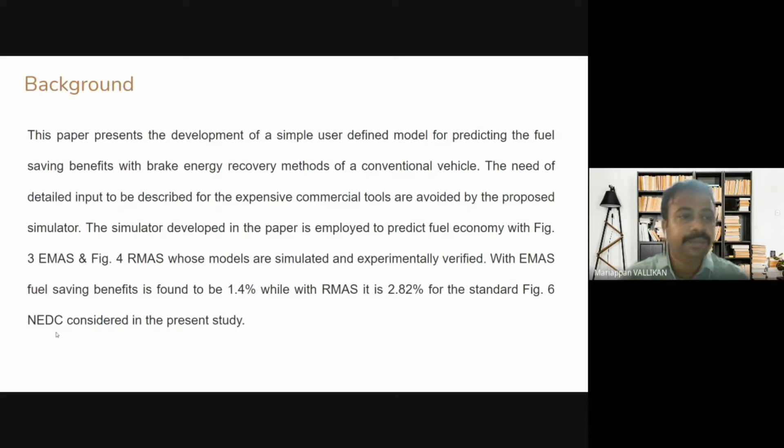What simulators are available? Today you see a lot of simulation tools commercially available, and you can check how they are modeled. There are many names, but the standard approach is a dynamic simulator using backward and forward approaches, or a lumped parameter model. These are the two types most simulator companies use to develop their models.

I'll give an example. Today you're familiar with circuit networks—you can model a resistor, a DC power supply, and make a measurement tool in MATLAB to visualize the voltage applied, the current, and the power dissipation. All this can be measured with the MATLAB simulator tool. But if you know the fundamental relationship between voltage, current, and power, you can also simply develop this simulator in Excel.

In Excel, if you know the mathematical or electrical relationship between your model's parameters, you can build your own simulator model. That was an eye-opener for me—that we can build a simulator model as long as we know the fundamentals of the electrical relationships between all the parameters. That's where I'm touching upon how to build our own user-defined simulation model.

That is how I'm limiting to that statement. I'm not giving a competency to the commercial simulator models. Right? Okay, what is the market trend?

Beginning with 2017 to 2030, we see lot of non-petroleum or gasoline based vehicles would be enormous in the market, and we say 2025 is the stage where we can see the drop in the conventional IC engine. So during 2021 also we have started seeing some of the electric vehicles coming to the market. So this is the market trend.

We can also see in 2017, 91% on the conventional IC engine, where conventional IC engine is nothing but where we fueled by petrol or diesel. So 91% is going to deteriorate to 67% in 2025. But there is no zero reduction, we still need to be with this conventional IC engine, not so bad. So it is slowly taking from a mild hybrid, then electric vehicles to the range of 25% in the market, then 5% on the LSEV, which means low-speed electric vehicles, light mobility. So that is the market trend.

And this is the architecture. So far, if any doubts, please rise. We can go dig into deep into the architecture level. If any doubt, please interrupt me, so far if you are not understanding any terminology or anything.

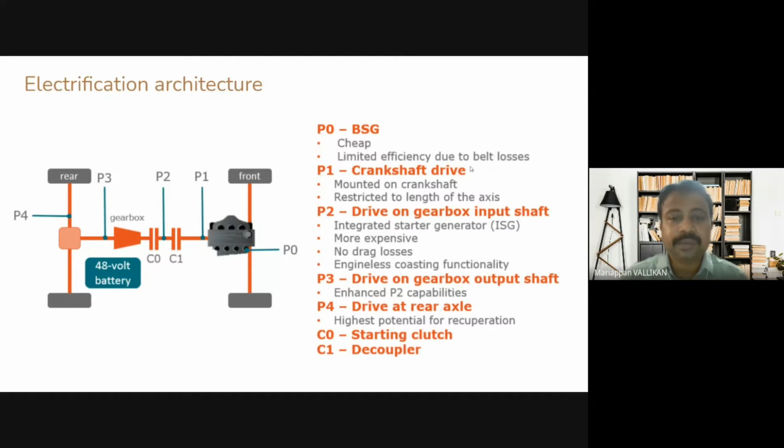Yes, next. Okay, so from now onwards we are going to introduce, today we are having a growing concern over environmental pollution and oil dependency. Today all the petrol prices are reaching to 100. So all governments are wondering where we can fight on the oil prices. It's going up, so it's not our interest, but I'm just seeing oil dependency on oil prices is very huge. And the automotive sector is continuously investigating on alternative fuels and modified powertrains, these are all things happening.

And hybrid electric vehicles offer fuel economy, why? Mostly by employing the regenerative braking system. What is regenerative? We can understand it in the coming slides. And hybrid energy storage, there is a lot of research happening on energy storage systems. Today, the automotive industry started using some batteries from chemical conversion, you might have heard of some lead acid batteries, now so-called lithium ion battery, and there are a lot of battery technologies also available.

And now recently there is a trend of using ultra capacitors that are equivalent to an alternate energy storage device. The same approach can be followed for a conventional vehicle to improve fuel economy. Okay, so all this we will see through the coming slides.

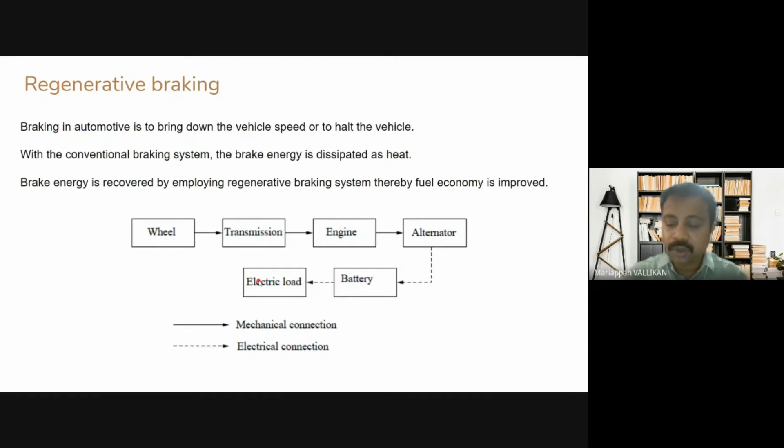And I'm going to touch upon batteries versus supercapacitors. I'm not going to go so deep into the chemical substance or physics inside the battery. I'm just giving some numbers so you can visualize how much energy density is stored by the battery, and how much energy density is stored by the ultra capacitor.

Comparing battery versus supercapacitor: battery has high energy density, say 100 watt-hours per kg, and it is only 1 to 10 for the supercapacitor. But if you look at power density, that is where the difference lies. At 10 watts per kg it is 1 kilowatt, so it is 100 times more in terms of high power density, 1 kilowatt.

And the battery has very low degradable cycles, meaning low life cycles, whereas the supercapacitor has very high life cycles. If you buy any car, once in 4 years or 3 years we need to change the battery, and the same story applies even to today's two-wheelers - we need to change the battery once in 4 years or 3 years. It also depends on how we are using the battery. Today everyone is using solar inverters and such things, and we know how frequently we face challenges in battery replacement.

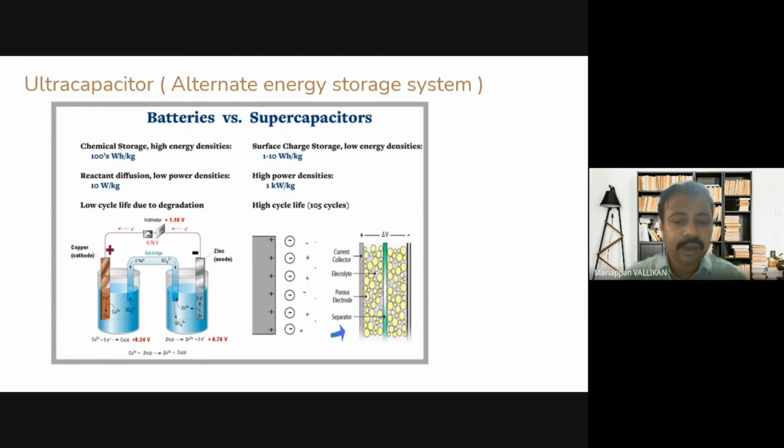So now we are talking about a regenerative braking scheme. This is the research proposal I made for the conventional vehicle, not electric vehicle. What are all the possible ways to get the regenerative braking energy?

The first one is the EMAS, which is the engine mounted alternator scheme. If you go back to the powertrain architecture, it is on the P1. If the alternator is mounted near to the engine and we are extracting energy from it, that is the engine mounted alternator scheme.

Then the rear axle mounted alternator scheme is P3. If you are taking the energy near to the rear wheel, then the scheme is called the rear axle mounted alternator scheme. So in P1 and P3 we can extract the regenerative energy during the braking operation.

This figure also shows how we can extract the energy, the power flow from the wheel. It goes to the powertrain, which is connected with the engine, and from the engine to the electric motor. For understanding, consider this electrical machine as an alternator. This energy can be transferred to the alternator, converted into electrical energy, and stored into the battery. This is just to understand how the mechanical energy can be converted into electrical energy and stored into the battery.

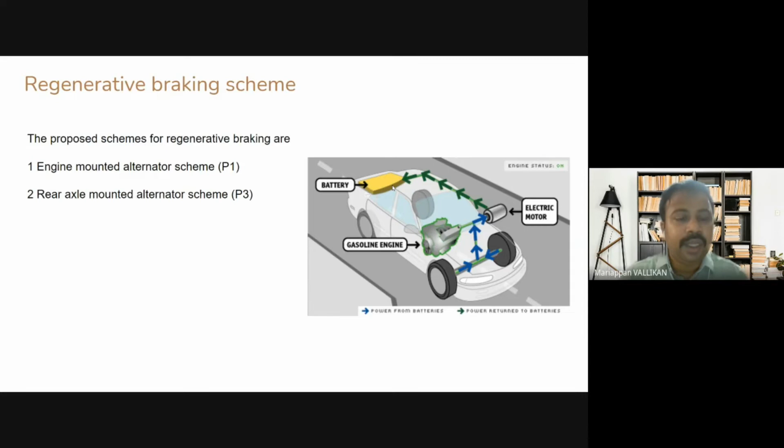So now we are going to understand what the EMAS scheme and the rear axle scheme are, and how we are doing the simulation model.

The engine mounted alternator scheme's electrical connection: the alternator converts mechanical to electrical energy and develops a three-phase AC waveform, a sinusoidal power. It will be developed from the alternator, and all automotive alternators have a rectifier unit within them that converts this into DC. In all electric vehicles or conventional vehicles, we deal only with DC power.

So don't get confused, we are all talking about DC power. When we have a machine developing AC, in automotive applications we convert it to DC using a rectifier, either a passive rectifier or an active rectifier, depending on the power electronic development work. We call it a rectifier.

The power out of the alternator is available to the battery through a series of switches, SW2 and SW1. Don't get confused about what SW2 and SW1 are, it's just the architecture I proposed, and it is also a patented one. What I am sharing is the patented architecture, which is the outcome of my MS research work. It connects to the battery and it connects to the load.

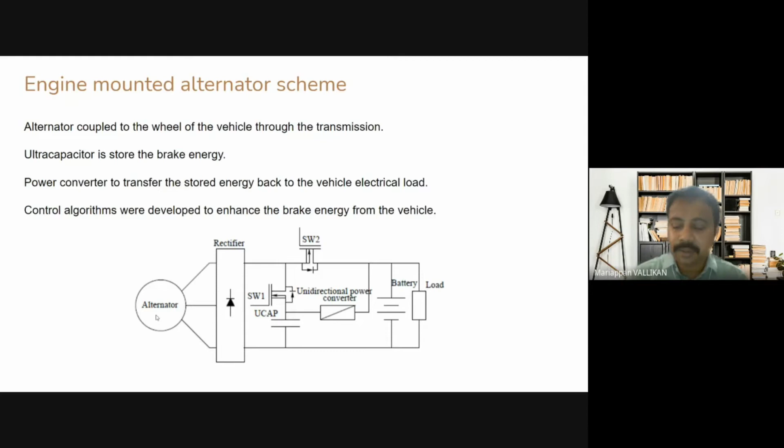In the rear axle mounted alternator scheme, how is the electrical connection? The first alternator is mounted near the engine, so obviously it is connected to the battery and connected to the load. This is the arrangement of the conventional electrical connection.

The rear axle is mounted near the rear wheel, where we will have some mechanical connection. It is also built with a rectifier, and it drops the power into the ultra capacitor. From the ultra capacitor, there is a unidirectional power converter, which we call a DC-DC converter. Unidirectional means the power transfers from one side to the other side only, not vice versa. So we call it a unidirectional power converter, and it supports the load. This is the electrical architecture.

So we saw the two schemes: how the EMAS or engine mounted alternator scheme, and the rear axle mounted alternator scheme, have their electrical connections.

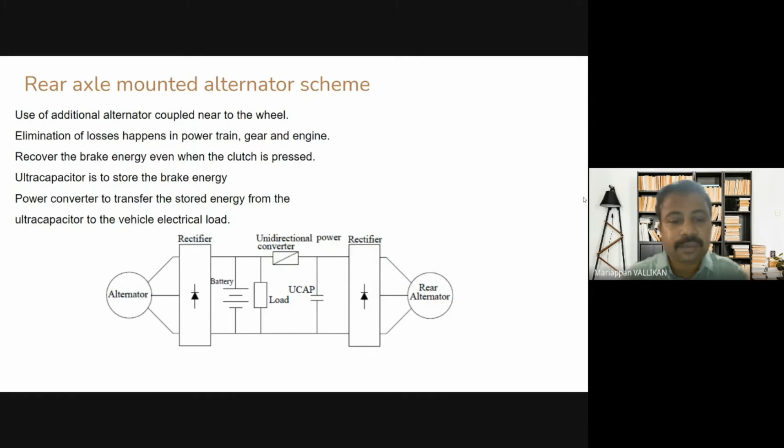Now we are going to understand how to develop the simulation model. I am bringing out the idea of why we need to do the simulation model. By approaching this scheme, I will definitely save fuel economy, I will have some fuel economy benefit. But unless you do a vehicle trial test, unless you do some simulation, you may not know how much you are going to save and what method gives higher advantages compared to other methods.

Okay, those are all doubts you will have. I said the simulation model is not less in commercial value, it is much higher in commercial value. So now we need to understand we can develop a simulator model to understand what electrical energy is available and how much fuel savings can be brought out from this tool scale.

So in any simulation, you will have a simulator with a lot of inputs. We will go through some subsequent slides to understand what is drive cycle, alternator, battery characteristics, ultra capacitor, boost converter, and the load. These are all block level understanding, showing what the output would be after giving all the inputs to the simulation model.

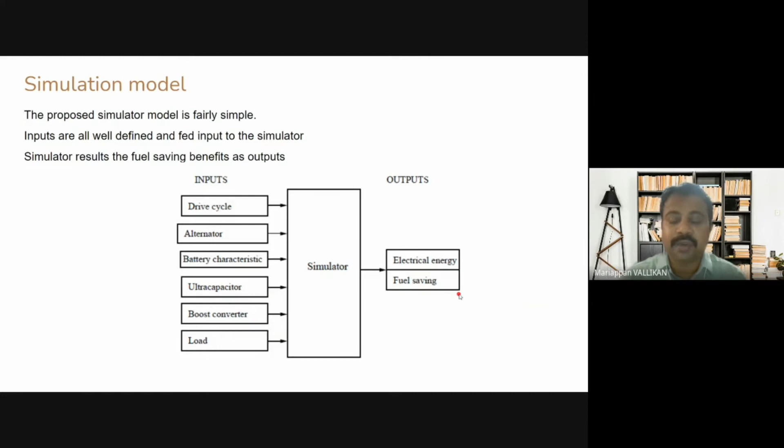So first we will touch upon the drive cycle. What is the drive cycle? Drive cycle is nothing but, say today you take a drive from your home to the college. How much of time you will accelerate, coast, maintain the same speed, and again decelerate due to traffic condition or some emergency. Those patterns are what we call the drive cycle. Is it clear?

If you take any city bus going from one destination, say in Bangalore from MTC station, reaching some other station, there will be bus stops. There it will stop and be at zero for some time, and again it will accelerate, maintain some speed, decelerate, and stop. This is so called the drive cycle, showing how we can understand the movement of the vehicle.

If we drive any vehicle coming into the market, the automotive industry will say this is the mileage for the car or two-wheelers, say 60 or 70 kilometers per liter for two-wheelers, or 15, 17, 20 kilometers per liter for four-wheelers. All this can be thoroughly examined only through the drive cycle. They will not claim the same mileage for any traffic situation; they will always say it is as per the standard ARAI drive cycles. There are organizations that do this standard measurement on fuel efficiency.

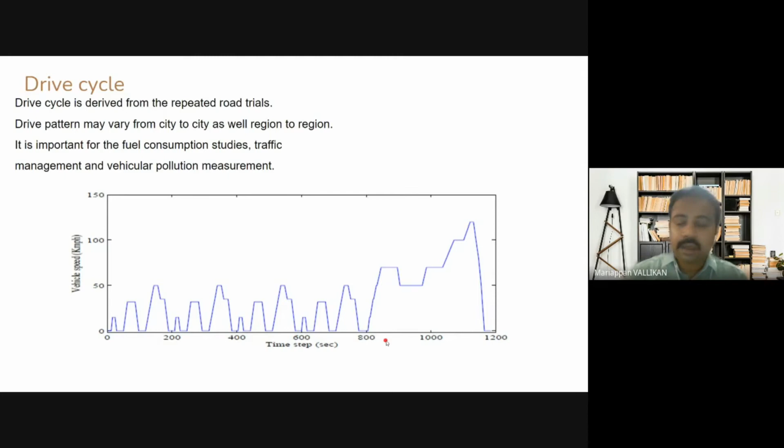These are all standards, right? So I hope drive cycle is clear for everyone. Now, alternator. In your lab, you might have seen some alternator or machines and done some experiments. What is the alternator? You need to give mechanical input like speed, and you take output in terms of voltage and current. You might be doing some OCC characteristics. This is somewhat similar to that characteristic.

If you run the alternator at 1500 RPM, and load it at 10 amps, this is the efficiency of the alternator, 34.1%. These are all test results.

Why I'm saying this is, if you want to build any simulator model, you need to have all the technical data. That's why this is important, which is what I'm emphasizing in this slide.

If you run the alternator at 1800 RPM and load it at 10 amps, meaning you're taking 10 amps of current or power from the alternator, what is the efficiency of the alternator? It's 33.9%. You may wonder why the alternator efficiency is so low.

It is because this is an automotive alternator, designed this way. In your lab, you may see efficiency of more than 80% or 70%, but compare the size of that machine to the size of this alternator in the vehicle. The size also matters, and at what power density level we are extracting this efficiency. Though these numbers may look odd, this is the reality.

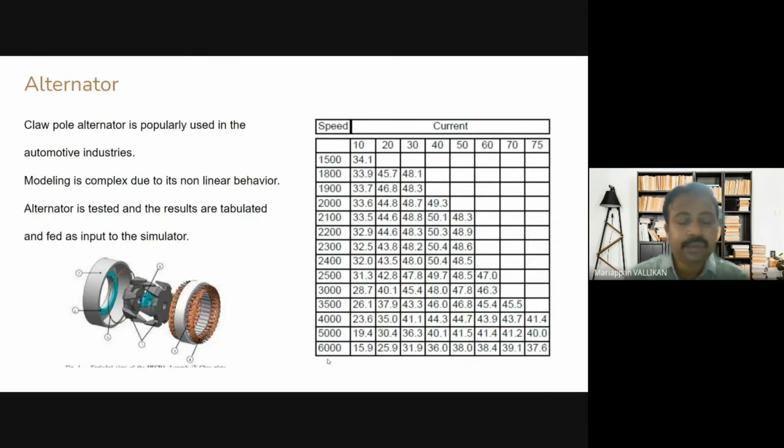No, sir. Okay, clear. Thank you.

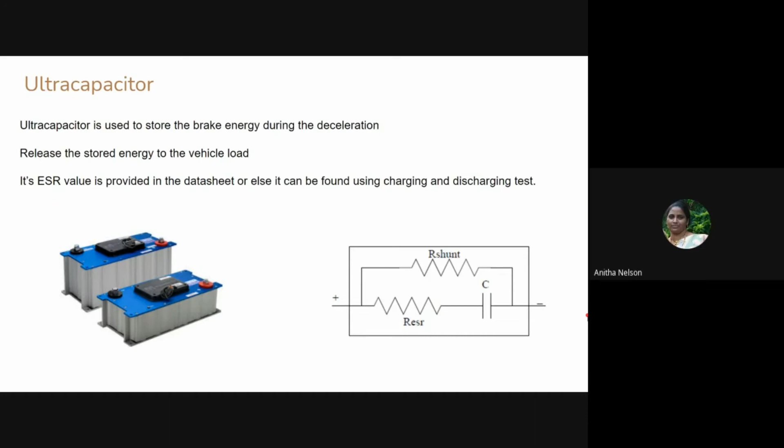Ultra capacitor is very simple in terms of electrical model. All the ESR value capacitors, what is the farads available for that, and what is the option. This naturally you can model if you know the circuit network level of models. If you know, you can calculate what is the voltage if you apply, what current it will take, and what are the losses on the ESR, everything with some small calculations using the circuit models. All the ESR data will be available in the data sheet, right?

Next, DC-DC converter. You might have studied this in your power electronics courses. What is a DC-DC converter? It converts one power level of DC or one voltage level of DC into either a step down or step up. Conventionally, it is equivalent to a transformer if it is sinusoidal voltage or AC power. If it is DC, and you want to transfer the power from one level to another, we call it a DC-DC power converter. You need to know the relationship, and which power converter you are going to use.

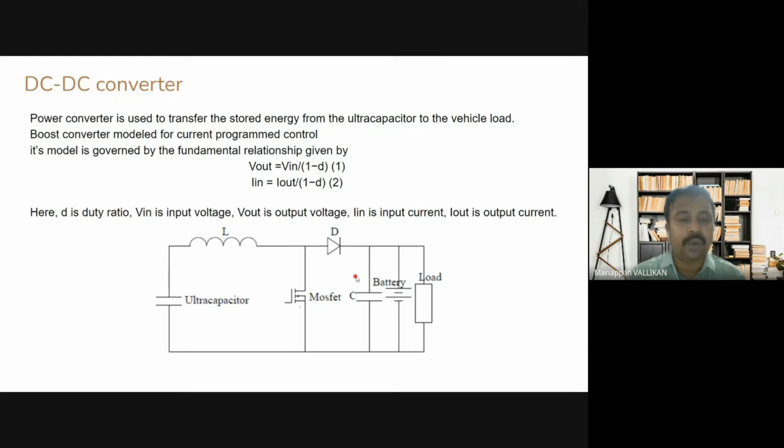If you see this architecture, the power network, it is like a boost converter, right? So with the boost converter, you have the relationship between V out and V in as a function of the duty cycle. That is the relationship irrespective of current or voltage. The duty cycle is the control parameter where you can control the output voltage.

Battery versus load. Today the lead acid battery is most commonly used for automotive applications. The model is developed on the charge balance relationship, and the SOC, state of charge, can also be predicted from the charge balance. The electrical accessories present in the vehicle form the electrical load to the vehicle. So this is how the battery and electrical loads are modeled in the simulators.

The charge balance is nothing but, if you charge a 40 Ah battery, 40 ampere hour means it can support for 1 hour. That is the charge balance. If you reduce to 20 amperes, then it can last for 2 hours. This is how the charge balance works.

If you want to charge the battery at 1 ampere level, you know how much time it will take to charge. If you charge it at 2 amps, how much time it will take. So everything - what is the input current, what is the output current, what would be the SOC. If the battery input current reaches 0, it means it is 100% charged. If there is battery current being taken for charge, then from the charge balance you get the SOC of the battery. You can do experiments on the battery, then take that input to your simulator. Clear?

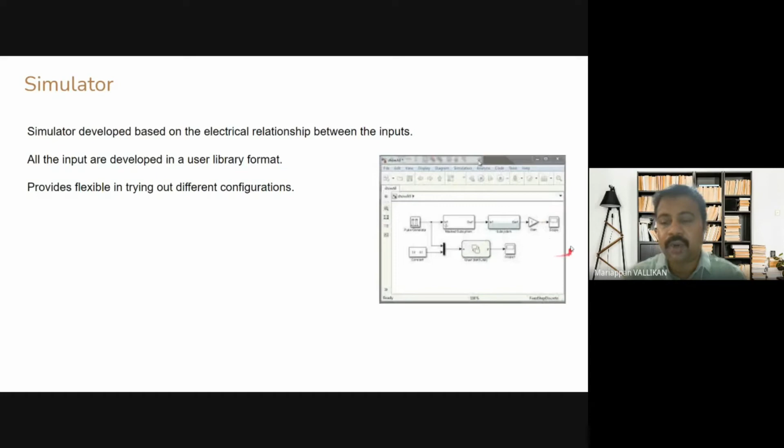The simulator is nothing but a connection of inputs to mathematical relationships, called the simulator. I've shown some example of the MATLAB environment. I'm not using MATLAB as the actual simulator tool for our simulator model, I'm just giving an idea of how simulator tools look like. All the inputs will be connected to some mathematical relationships, and so on. You will get some scope arrangement to get all the functional outputs. That is how it's called the simulator, right?

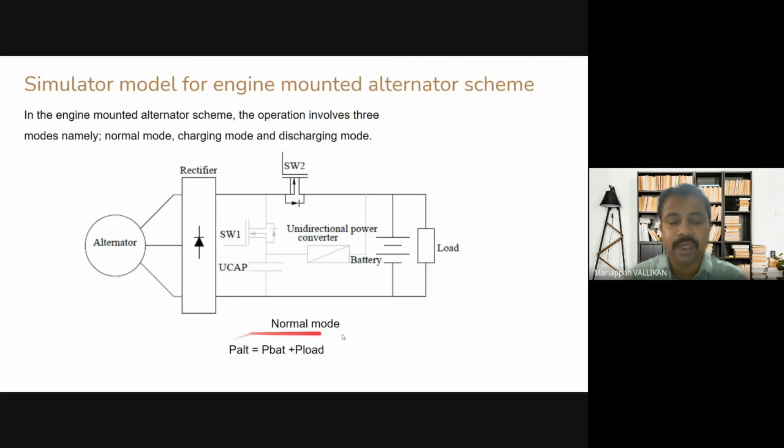All these are disabled, but you are only going to do the control algorithm. So depending on the method, what switch has to be turned on, what switch has to be turned off, everything you are going to control. During normal mode, I will make SW2 closed, so the power equation during normal mode is: alternator power equals battery power plus load power. Similarly, for the charging power during the braking mode, I will turn on switch SW1. So the maximum power developed by the alternator goes to charge only the ultra capacitor. The regenerative energy is now stored only in the ultra capacitor.

Why am I not considering charging the battery directly for regenerative braking? The ultra capacitor has high power density because it can capture high power in a shorter duration. If you send the energy into the battery, it will take longer time to absorb that power, so we lose efficiency of the regenerative energy. That is why we use the ultra capacitor to take the quick energy during the braking period.

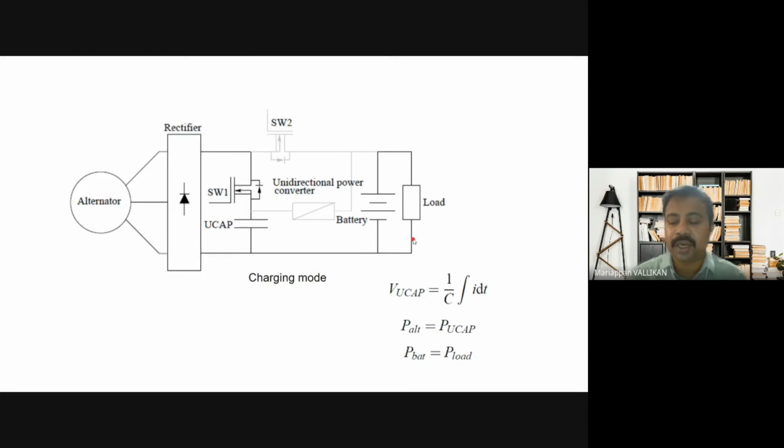So during the charging mode, what is the power equation? You see how the voltage across the capacitor will rise. We know the electrical relationship: 1 by C integral of I dt. So the alternator power is equivalent to the ultra capacitor power. What is the battery power? During that time, battery power will support the load, so we will not have any discontinuity of power to the electrical loads inside the vehicle. Everything is balanced.

During the discharging mode, after the braking event, the energy is available in the ultra capacitor. Before the next brake cycle, we want to discharge the energy stored in the ultra capacitor to the battery and to the electrical load, so that the ultra capacitor can be ready for the next braking cycle. That is why we need a control algorithm to discharge quickly after the brake cycle event.

So now the ultra capacitor is going to discharge, so the voltage goes negative. 1 by C integral of I dt, and the ultra capacitor power plus the alternator power, both equal the battery power plus load. Then if the ultra capacitor is supplying power to the load, how is the alternator power affected? The alternator will naturally reduce its power because two energy sources are coupled in parallel here, so the DC-DC converter takes care of which power source has priority for discharging.

For example, if the alternator is coming from 13.5 volts, and the DC-DC converter is set at 14 volts, then the power is naturally discharged from the ultra capacitor, because the DC-DC converter controls the priority of whether power comes from the alternator or the ultra capacitor to meet the battery as well as electrical load demands. That is how the control architecture needs to be developed here. This is the control method I have followed.

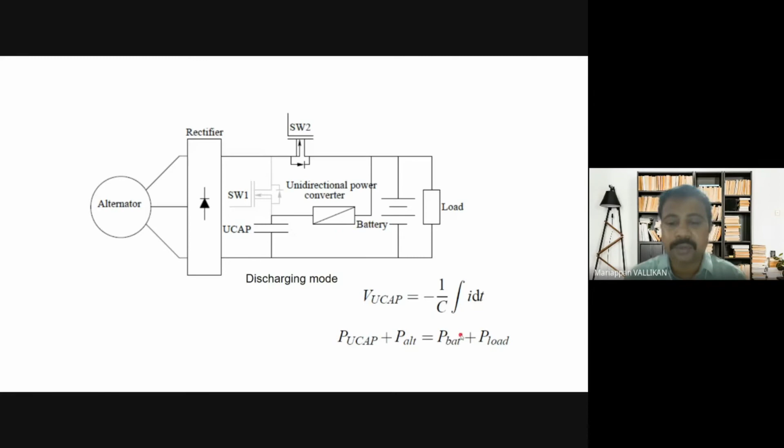Clear? Similarly for the rear axle mounted alternator, you can see how the alternator supports the electrical power for the battery, right? That is also given here. The alternator power is equivalent to battery power plus load power.

And during charging, here the rear alternator is connected directly to the vehicle wheel. Whatever wheel power is available immediately converts into electrical power and charges the ultra capacitor. We can also enable the DC-DC converter to discharge the ultra capacitor energy to the battery as well as the load. So why is the alternator rectifier disabled?

The same reasoning applies: if the unidirectional power converter is set at a high voltage, the alternator will naturally be disabled. These are all taken as advantages of how to disable this alternator using the DC-DC power converter.

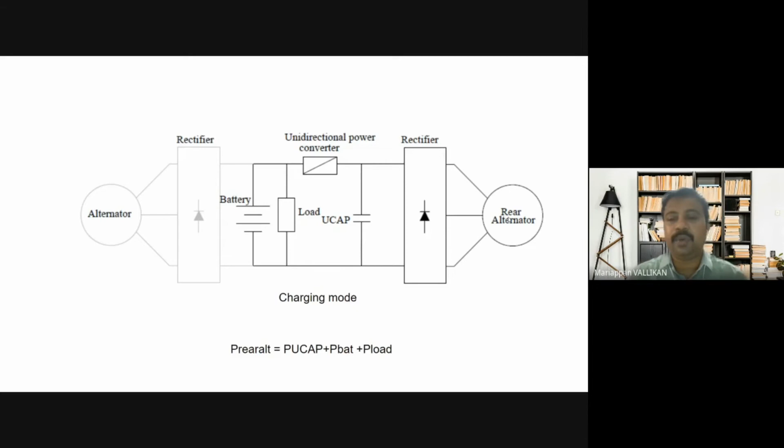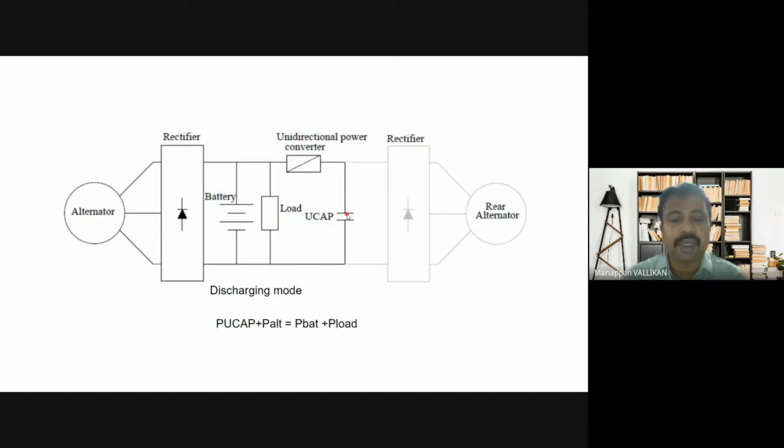During discharging mode, if there is no power from the braking period, the alternator is also disabled, and now power is only available in the ultra capacitor. So by enabling the DC-DC converter, the ultra capacitor power will support the battery power as well as the load power. Now we understand all the electrical relationships of this scheme - what would be the power flow from where to where.

Everything we know. Now it is the understanding of electrical energy conversion to fuel energy conversion. These are all the numbers from the fuel energy density. Today the simulator gives the fuel saving in terms of CC. CC is nothing but ml - 1 ml is equivalent to 1 CC.

And the results are very flexible. We can take it in Excel, or you can also do some macros programming. And even if you have any MathCAD or MATLAB M file, you can do programming as well. Everything you can do, even Python simulations, whatever. If you are much more comfortable in any mathematical model, you can develop whatever result you want.

And what is the result format, whether you want it in a graphical environment or a report format. Taking an example of specific energy density of fuel, you can try this for petrol or any gas you're interested in. All this data is available for specific energy density of fuel. I'm considering diesel.

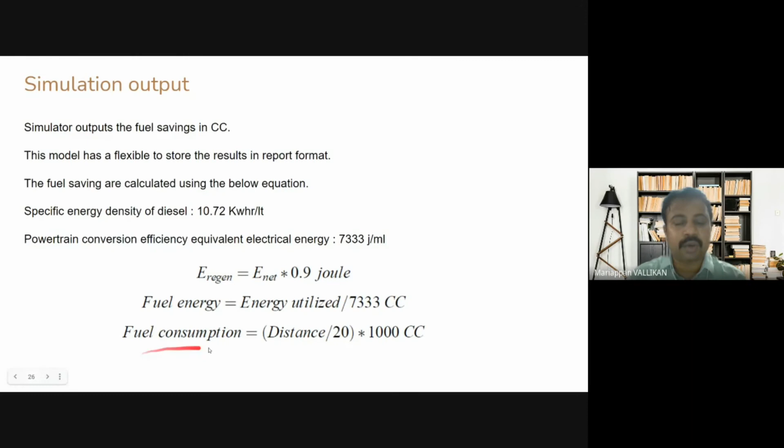Here I can take the numbers. My vehicle has some 20 kilometers per liter mileage. So I consider some mileage numbers, and from this you can also understand what would be the fuel consumption. All these are backward calculations.

So now I have modeled the simulation and have some relative things. How do I ensure my simulation model is correct? There I need to do some practical testing. It doesn't have to be a vehicle level test, you can do some test bench level test.

Now all the system is available, the ultra capacitor, battery, alternator, everything. So you just do some experiments and measure how much the alternator is powering, how much the battery current is, what the ultra capacitor voltage level is, everything captured in your oscilloscope. When the same parameters are modeled in the simulation, you can confirm whether the same thing is available.

May I know which simulation software is being used, sir?

This is user defined, so I'm not using any standard model. I developed my own simulation model, partly in an M file, and I developed some cases in an Excel file, those kinds of things. Okay sir, thank you.

It's clear, I'm talking about avoiding commercial software. What we go through is, however, once we have all the electrical relationships, we can also model our own simulation models. We can make use of any mathematical simulation tools, even MathCAD if it's available in the universities.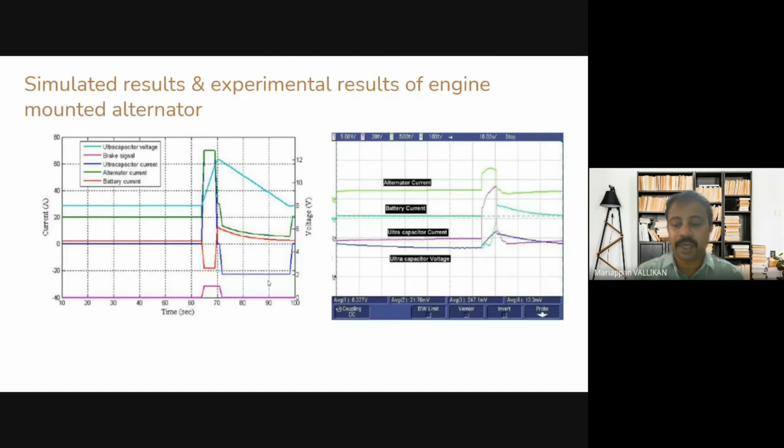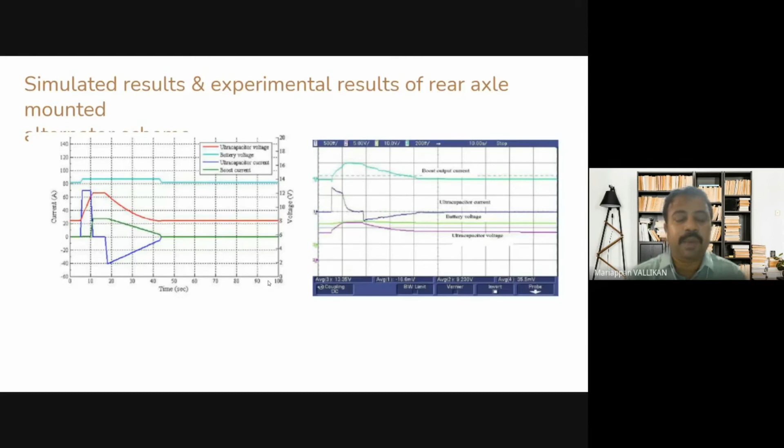I experimented the same thing for the rear axle mounted alternator. If you see the results, everything looks similar. So then I conclude my simulator model is perfect, it's working. Only then can I take it to the next level. What can I do for the next drive cycle? What would be the fuel benefits? These are all the inputs.

The input for the drive cycle is NEDC, New European Drive Cycle. What is my alternator and battery rating, initial SOC of the battery, ultra capacitor rating - you may see 200 farad, it's a very huge number - the power converter ratings, 420 watts, and what would be my vehicle mileage. All these are the inputs.

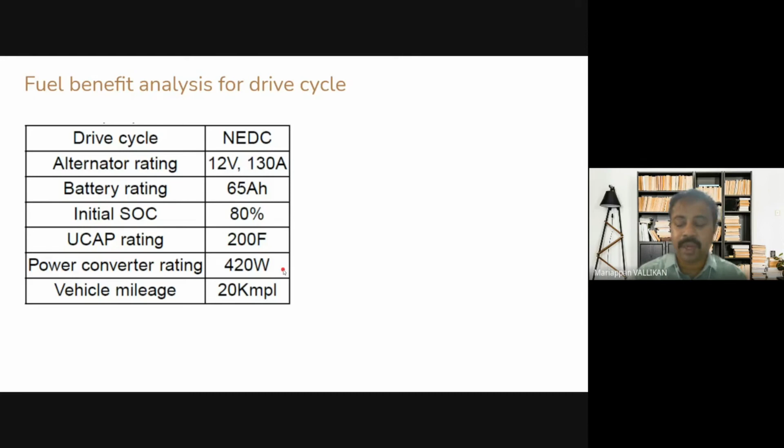Then these are all the outputs from the simulation model. The NEDC drive cycle model is like that. So ultra capacitor voltage - you see during every brake cycle, voltage shoots up, it will discharge, and it will be constant. So this is how the voltage behaves. So my model is working good.

And also I can measure my ultra capacitor current. During charging of voltage, my current also is going high. And also I can see my alternator current and the battery current. So everything I know, so I can see how my simulation model is working.

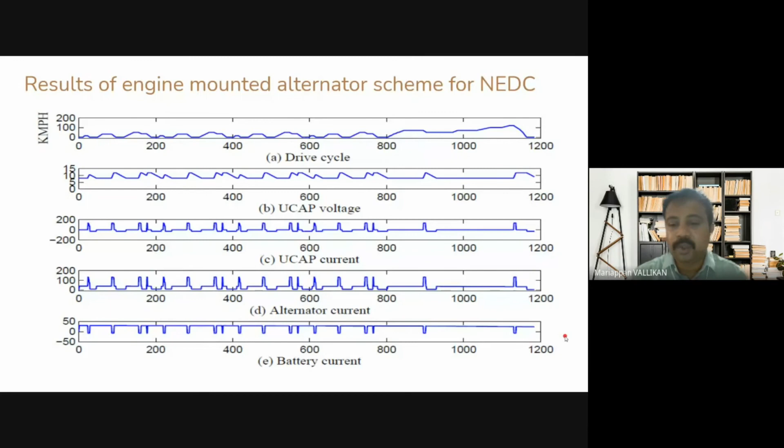From those results, and even the results for the rear axle mounted scheme for the same NEDC drive cycle, only then can I get to the conclusion that the two models I've done some quick tests on, my simulator model is okay. Then I can also predict the fuel economy. So what is the fuel economy? I recorded a higher percentage in rear axle mounted scheme, 2.82%, and 1.4% for the engine mounted alternator scheme.

So now I would be in a good position to give some confidence to the automotive industry, or to my company, or to any auto OEMs. If you approach this scheme, you will have better fuel efficiency improvement by adopting this regenerative braking scheme.

That is why we need this kind of simulator tool, if you want to develop, unless your university or company doesn't have one. So you don't want to be handicapped. I'm just giving the idea: if you don't have models, you can as well develop the models, and compare how to develop your own models, step by step comparing all the data.

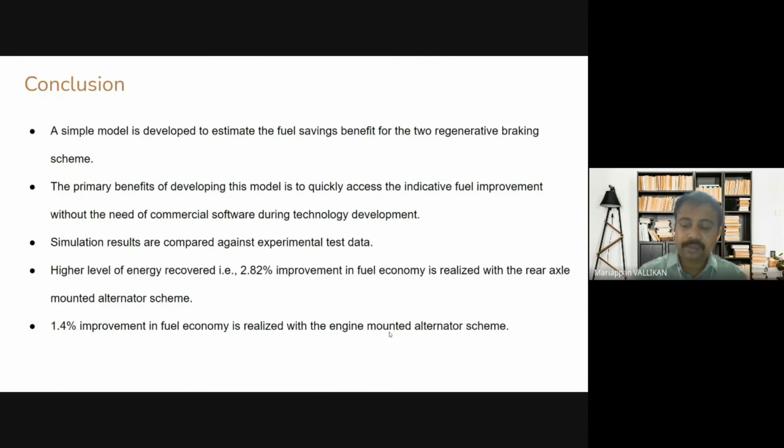I hope we've come to the conclusion. If you have any clarification, this is the outcome of this IEEE conference paper. You can take some time to read it, and get a better understanding of the models and the regenerative braking scheme.

This slide is a combination of two conferences, published during the year 2014. It was published in Romania, in Europe. Am I audible, sir, now?

Now it is audible. You can ask. Okay sir, actually ultra capacitor profile is not constant, no sir. Can we connect directly in parallel with the battery?

Yes, it's a good question. Thank you, Satish. Good question, Anita. Okay, I'm just giving an idea of how to connect the batteries or anything. If you have the ultra capacitor, it's nothing but an energy storage device, right?

If you connect it across the battery - the ultra capacitor and battery are both energy storage devices - if you connect them in parallel, what is going to happen? The energy available from the battery is going to the ultra capacitor. After transferring energy from the battery to the ultra capacitor, the battery will be at low energy, so the SOC will be lower.